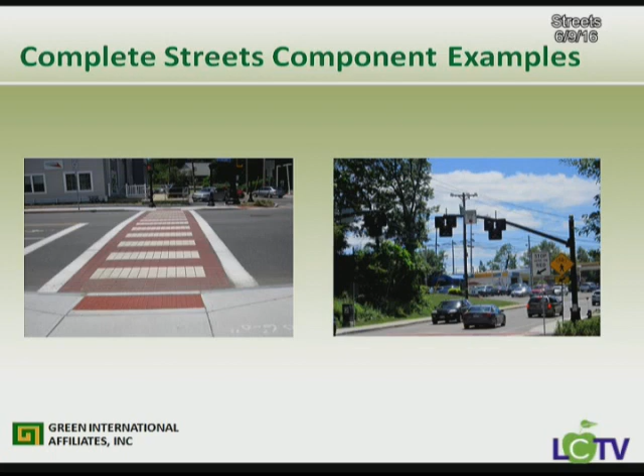We'll have some - if I can get through it, then we'll do questions on general items, and then, if that's all right, we'll go through our Littleton section and have more questions, and ultimately we'd like to just stop and have a conversation.

Again, this is just an example. On the left side, it's a road in Norfolk - a two-lane road, but they really tried to be careful, providing 2 lanes with wide enough shoulders that bicyclists can travel. Where there were a couple of intersecting streets for crossings, in this case there was a slight sight distance issue, so they had a little beacon. It provides access to a major recreation area in the town, so they were able to provide one sidewalk on one side of the street and bicycle accommodation - you can drive, walk, or bike to the rec center.

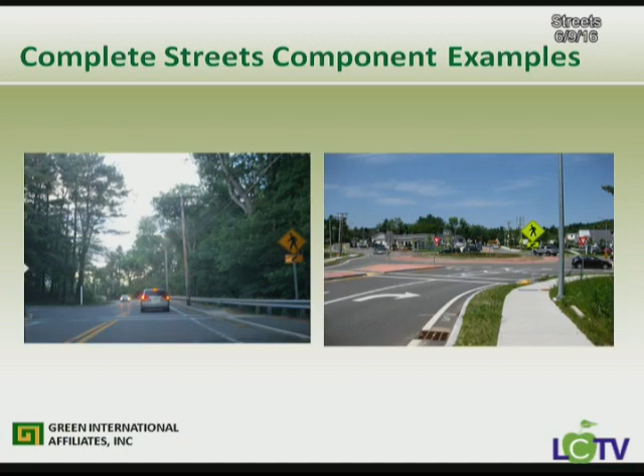And that's just on the right side, a picture of a roundabout. Sometimes instead of signal control, you might use a roundabout to control traffic, and again, break up the visual and slow traffic down.

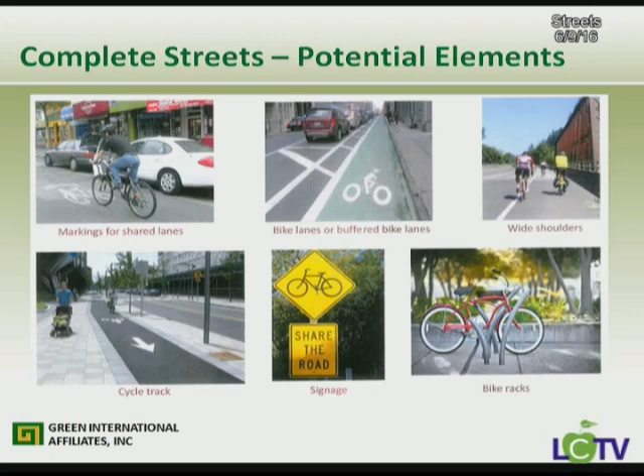Again, potential elements - these are different markings, different types of signage. You'll hear us say later about bicycle accommodation, and part of that is parking for bikes. What they're finding is if you don't provide any parking for bikes anywhere, it's just one more thing that reinforces someone's attitude against riding a bike.

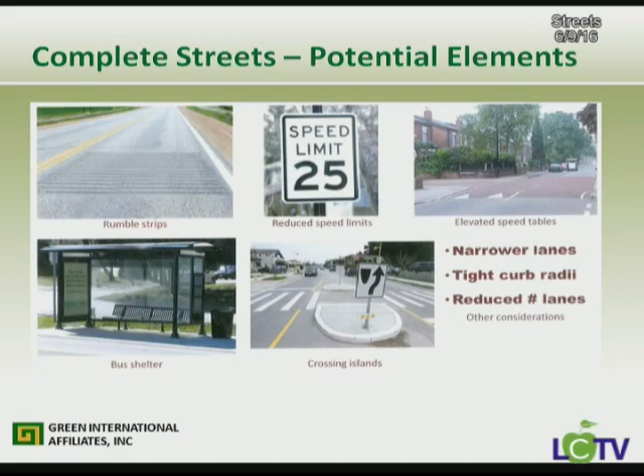Traffic calming measures, speed reductions, again, medians or something to break up the pavement, reduce the crossing.

But why is it important? It goes back to the overall concept - it provides for safe movement. It allows safe movement by all types of users, better health, even stronger economies. You start to reduce pavement and encourage walking, encourage biking. They find a positive in a lot of different areas. And it's fair.

The MassDOT Complete Streets program, I think, is probably the only one in the country that actually developed a grant program for complete streets. But instead of just handing out money, they said, okay, we'd like the town to think about it and put something together that's more comprehensive. Don't come in with a project and want to add a sidewalk to it, but think about what you want to do as a community. Their goal is if you get 351 communities doing it, all of a sudden we have a more connected and fair state - a Complete Street, got a complete state.

So again, it's to provide incentives to develop, and in the end, it's to facilitate better travel. Keith mentioned the Complete Streets policy, so that was the first level.

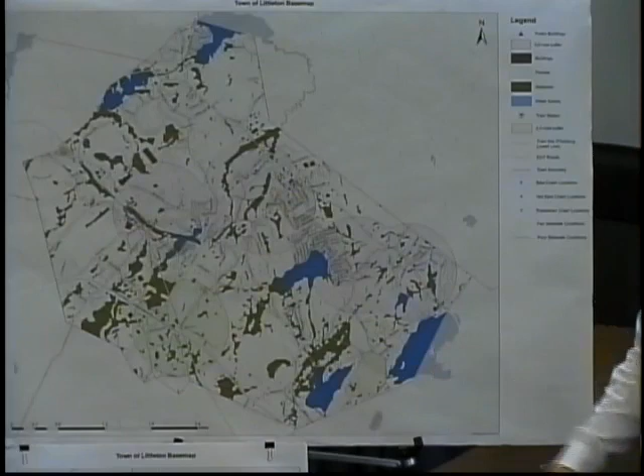So those were taken into consideration here, as well as any crashes involving pedestrians or bicyclists within that 3-year period. As Isabel pointed out, they're also shown on this map here. They're probably pretty tough to see, but feel free to come up and view them later. Here we have 2 bike crash locations in blue, hotspot locations are the green circles, and the pedestrian crash is the pink circle on the map.

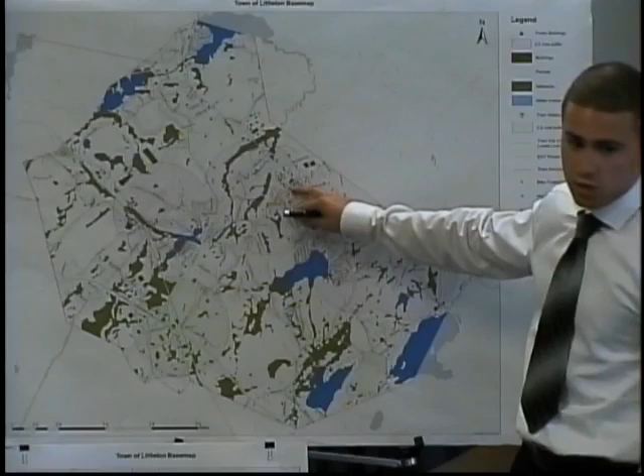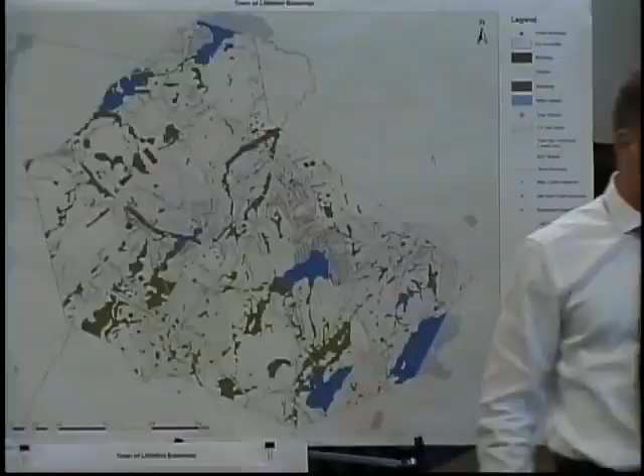So the pedestrian crash was at Kimball Street and the intersection with King Street. The 2 bicycle crashes were pretty close to the town common area. One was actually right at the intersection of Goldsmith Stevens Street and King Street. The other was near the post office on Jennifer Street at the intersection with King Street. Those were the only three crashes in the most recent 3-year available period involving pedestrians and bikes.

So after the safety data analysis, we conducted what we call a windshield survey. Bill mentioned this briefly in his presentation. Basically what we did was identify roadways within the town that we felt were of high priority, worth going to see what was available — the existing conditions pertaining to pedestrian accommodation, bicycle accommodation, the roadway widths, roadway pavement conditions, whether the roadway was wide enough to accommodate bikes, the sidewalk conditions, whether there were curb ramps at the transitions from sidewalk to pavement and at driveways on the roadway, and whether there were detectable warning panels present on those curb ramps.

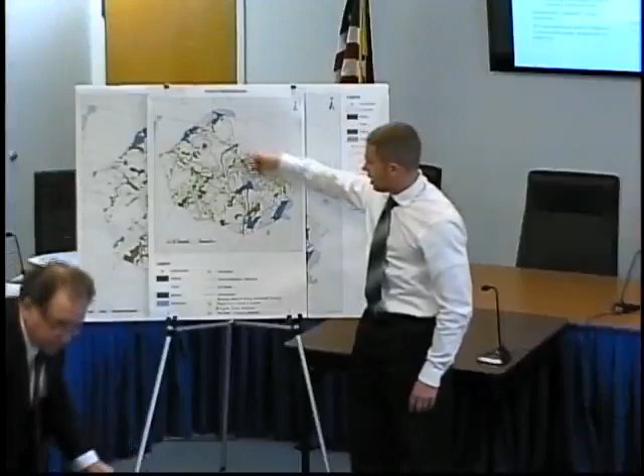And are those marked on that map? They are not marked on this map here. They are marked on this map here — the streets highlighted in yellow. So all the streets highlighted in yellow are the streets that we conducted the surveys on throughout the town.

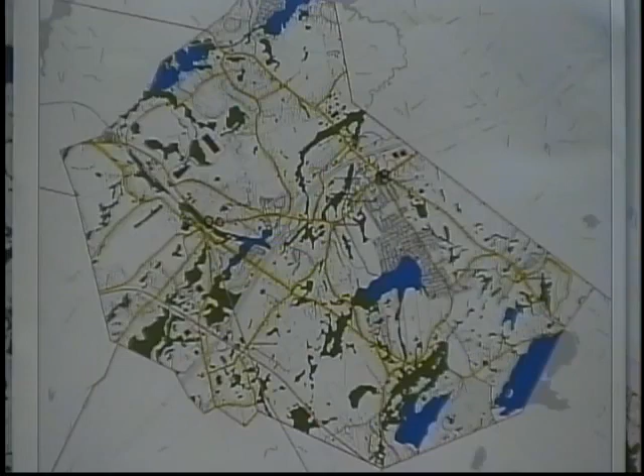Basically, how these surveys were conducted: we had 2 people go on these surveys, one driving. Obviously the driver can't take notes while driving, so we'd have the passenger take notes. The driver would analyze the roadway, see anything that jumped out at him, but mainly it was the passenger identifying any of the things I just mentioned — what we were looking for. We created segment forms and intersection forms, so there was a form for roadway segments, checking off all the things I just mentioned we're looking for, what's available for lighting on the roadway, and whether there were pedestrians or bicyclists traveling on the roadway during the time.

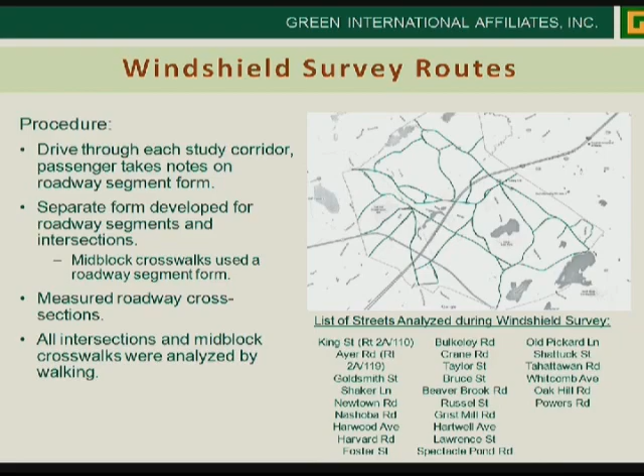I remember the day you told us you were doing it, so we could tell the police which roads it was, in case anyone said, hey, there's someone driving slowly — because periodically they would stop just to take measurements or pictures. Yeah, sure.

That was particularly when we would stop at any mid-block crosswalks along the roadway, like Keith or Jimmy mentioned, basically on the Mass DOT roads, King Street and Great Road. We'd get out, observe if there were handicap accessible ramps, detectable warning panels, warning signage, what was there at the crossing, as well as any crossings at unsignalized intersections. We did do 4 signalized intersections within the town: Great Road and King Street and Ayer Road, Great Road and Powers Road, and Great Road and Russell Street and Constitution Ave.

In addition to doing the windshield survey and reviewing the crash data, we also took into account background documents, including any plans available for roadway improvements and construction going on. We identified a few that are currently in construction, that we have designed, or are planned to be reconstructed in the future.

One that was just recently constructed, which we designed, was Harvard Road. To incorporate Complete Streets design aspects, we narrowed down the travel lanes to provide a 3-foot striped shoulder in each direction, to accommodate bicycles mainly. We also installed share the road signs for pedestrians and bicyclists, which can be seen in the top right picture, taken during our windshield survey last month.

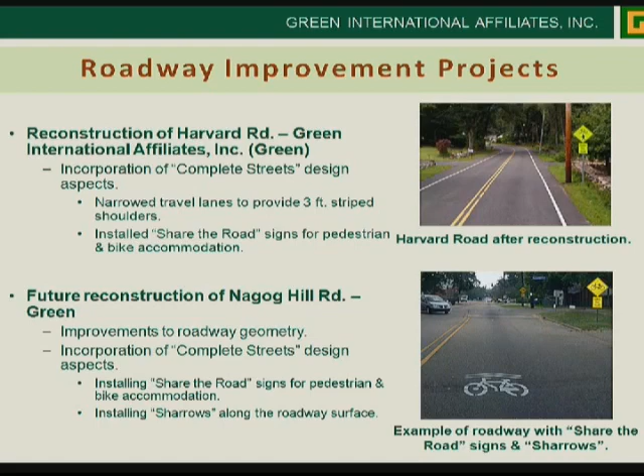Two more projects that we have designed: one currently under construction is New Estate Road, building a 5-foot sidewalk along it. The main reason is to provide a sidewalk connection for kids at the high school traveling on New Estate Road. This will be done in two cross sections: one includes a 3-foot grass buffer between the pavement edge and the sidewalk, 10-foot travel lanes, and 1-foot unmarked shoulders in each direction.

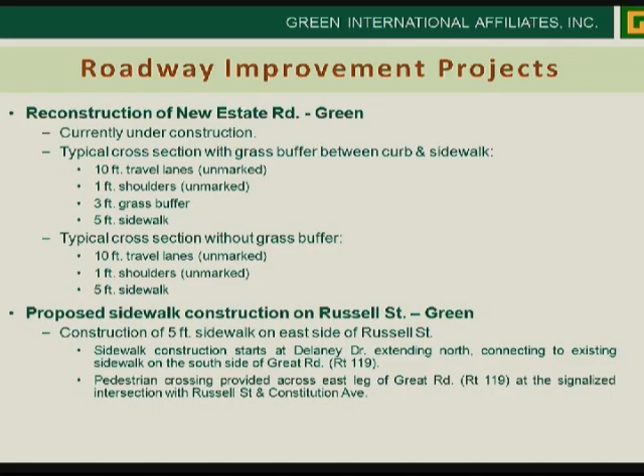Another future construction job Green has also designed is the proposed sidewalk construction on Russell Street. The project limits are from Delaney Drive to Great Road, constructing a sidewalk on the east side of Russell Street. This will tie into the existing sidewalk and connect to Great Road, accommodated by the signal at the intersection of Russell Street, Great Road, and Constitution Ave.

After the windshield surveys, we compiled all our data, sorted through it, summarized everything, and identified needs of improvement. Here we see the Littleton Common area, shown on the slide on the right. A few things we noticed: the wide crossing on the southwest side, across King Street at the intersection of Goldsmith Street and Stevens Street, currently a 75-foot crossing that's pretty wide open. There's poor driveway recognition, no bicycle accommodation, and insufficient pedestrian warning signage available to warn drivers.

I think there's one pedestrian warning sign facing westbound driver traffic going into that intersection - it just sort of scares you and you move into it. There's traffic coming from about 7 different directions, and a lot of driveways there that just come out of nowhere. That's where one of the pedestrian-bicycle crashes occurred, right at that intersection on Stevens Street - so that was an area of concern there.

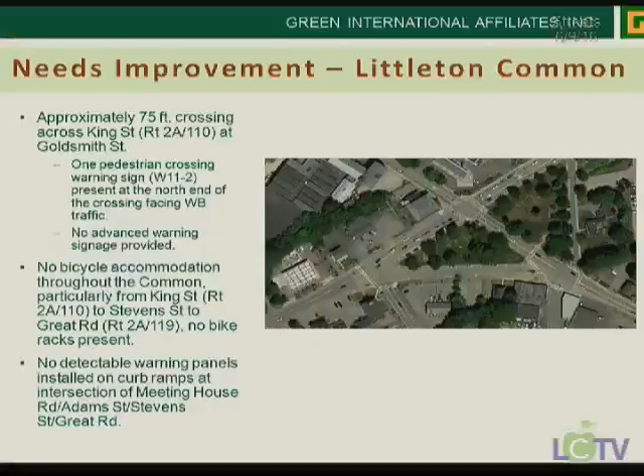The curb ramps are in pretty rough shape. As I'll highlight later, one of the crosswalks doesn't even lead to a curb ramp. In addition, the curb ramps at the signalized intersection of King Street and Great Road are in rough shape - steep, and not located near the pedestrian push buttons to actuate the signal. This is a scary area for a sighted person, and we have a blind person who lives in that area, so there's definitely a need there.

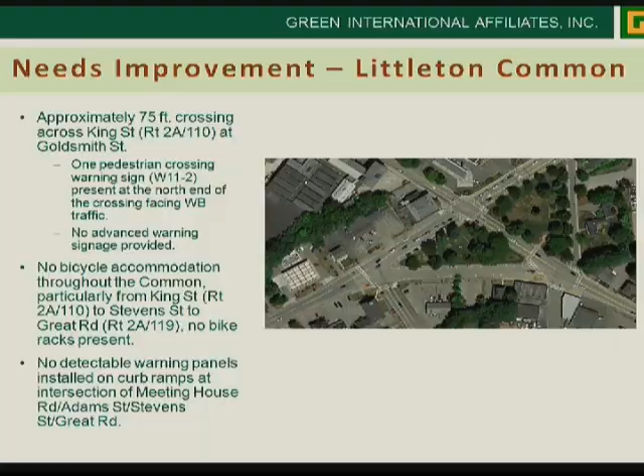Also in this photograph are a couple of areas that are wide open, even though they're off-street parking - it's a wide open entry into areas with no sidewalk at all.

We also identified Foster Street as a need for improvement. As you probably know, the Littleton and I-495 commuter rail station is located on the southern end of Foster Street. In addition to the need for pedestrian and bicycle accommodation due to the commuter rail station, it was also identified by a study done in January of this year, called the street scan study. They have sensors that scan all the streets in town and assess pavement condition to identify streets of high priority for roadway reconstruction. Foster Street was identified as the #1 priority due to its poor pavement condition.

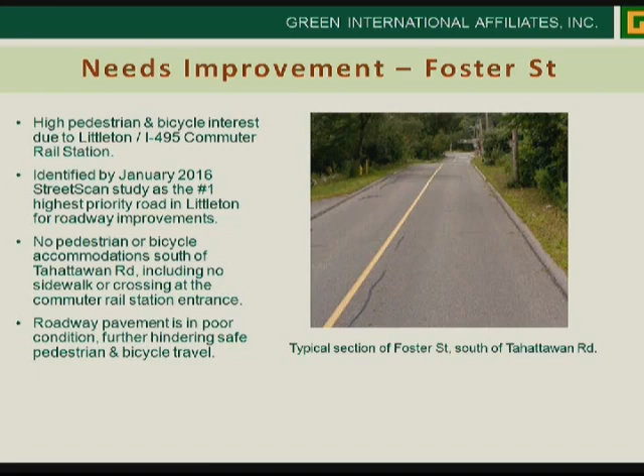In addition to the poor pavement condition, there's currently no pedestrian or bicycle accommodation south of Tahatawan Road. There's an existing sidewalk on the west side of Foster Street, but that terminates at the T intersection of Tahatawan Road. South of there, it's striped as a single yellow center line, 10-foot travel lanes, no shoulders, and no bicycle or pedestrian accommodation. The roadway pavement, as mentioned, is in poor condition, which further hinders pedestrian and bicycle travel safety along that roadway.

Taylor Street as well provides access to Foster Street, and it's also directly off of Route 2. There's a sidewalk along the northern segment of Taylor Street, then a gap between that sidewalk and a sidewalk just on the Route 2 bridge overpass. The sidewalk on the overpass ends and doesn't really connect to anything - there's no connection between Taylor Street and Foster Street for bicyclists or pedestrians.

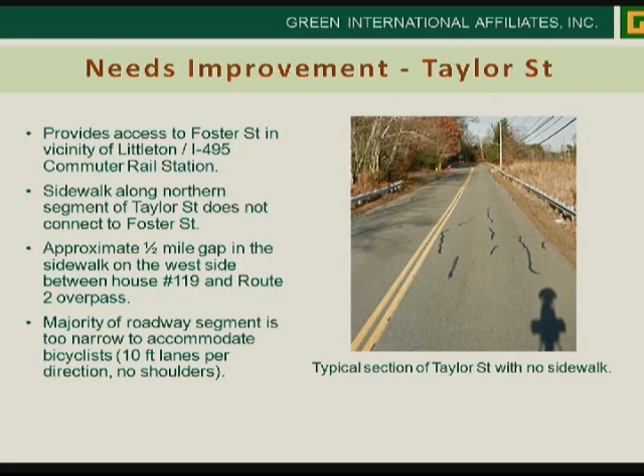And even further on, if you keep heading towards Acton on the south side, the sidewalk becomes even more and more difficult to find. It actually ends - you'd need to send an archaeologist out there.

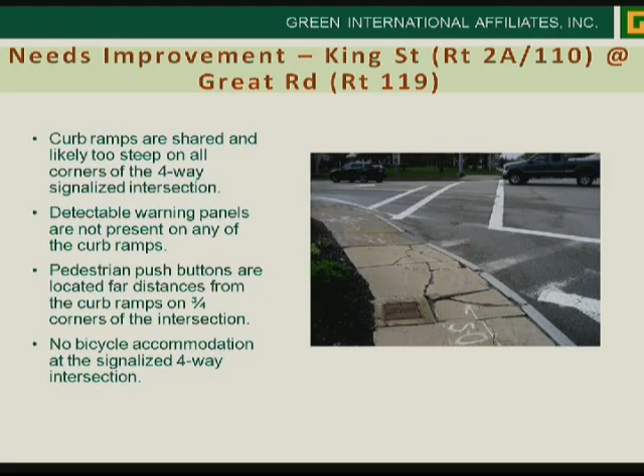I've already touched on this when we mentioned the Littleton Common area - this is the signalized intersection between King Street and Great Road, routes 2A, 110 and 119. Here, all the curb ramps are in pretty rough shape. The concrete is kind of withering away, cracking. The curb ramps are steep, and they're far distances away from the pedestrian push buttons to actuate the exclusive pedestrian signal phase at the intersection. There's no bicycle accommodation at the intersection as well.

Those ramps were put in the early 80s, when they reconstructed the common, and that ramp happens to be broken because it's such a tight intersection that the trucks drive over it all the time - that's why it's all broken. So those were identified as issues at that intersection.

Here is crossing across King Street from Rogers Street to the Castle in the Trees playground and the park. That was actually just renovated by Green International - they redid the basketball courts there and some landscaping.

Here, there's no detectable warning panels installed at the curb ramps. The pedestrian signage is out of date and also not consistent. The advanced pedestrian warning signs do not have ahead plaques, which some don't, but this could also cause confusion as to where the pedestrian crossing location actually is - is it there? Is it ahead? There's no real guidance there.

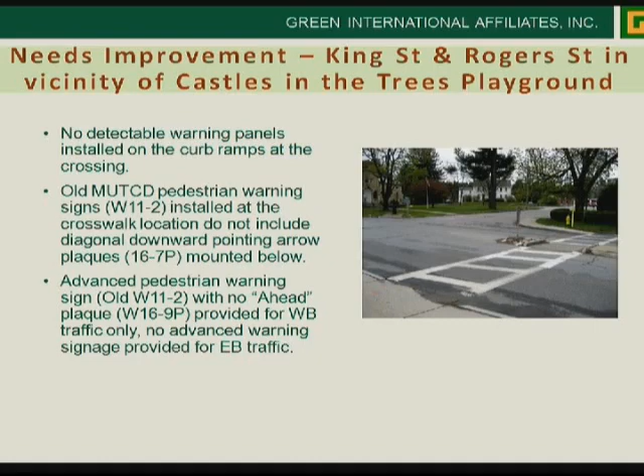Wasn't that a pedestrian fatality, but outside of the 3-year look back? Yeah, but that was installed, I believe, because of the fatality. The other crosswalk was further up past the historical building, which got removed and put here, and that was the design of the time - to put the little safe island in the middle - and the detectable warning panels weren't required at that point.

Okay, and here is the intersection of Russell Street and King Street. This was identified because there are 2 schools located on Russell Street: the elementary, Russell Street Elementary, as well as the middle school. And there's a sidewalk along the northern side of King Street, which is a major roadway and travel route in the town.

The curb ramps are in poor shape. It might be tough to see the picture on the lower right, but there's a huge pothole at the transition from the sidewalk to the pavement surface. There's also no crossing available on that roadway. If you're traveling on the northern sidewalk on King Street and want to get to the sidewalk on Russell Street, on the east side, there's no crossing, signage, or crosswalk markings for you to do so. So in addition to the poor ramps, no detectable warning panels, and trip hazards in the ramps and crosswalk markings, there's definitely room for improvement for pedestrians.

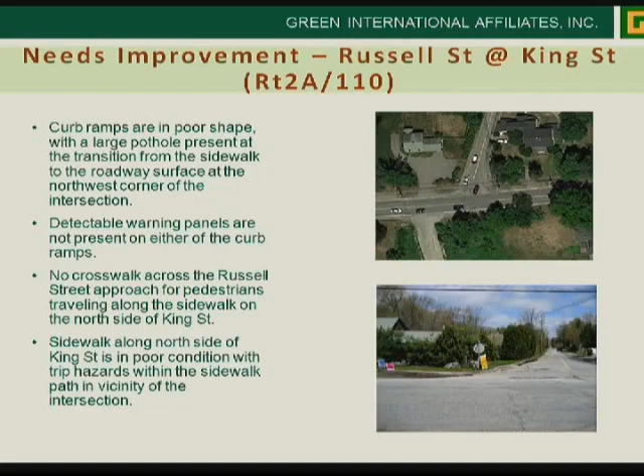We've met with the neighbors a number of times, and there's a real need for some traffic calming techniques here. As you've said, there are 2 schools on this street, but a lot of vehicles seem to be in a mad dash to get to the school, which means that intersection from King Street onto Russell gets a lot of traffic making quick turns. It's been a priority to figure out how to make that a safer intersection for residents as well as users.

Just to be clear, it's not a pothole in the road, it's from cars driving off the road, and primarily the buses, that create the hole. Right, it's beyond the curb. It's been filled in, but every single street going up that side, there's no crosswalks on any other streets going up.

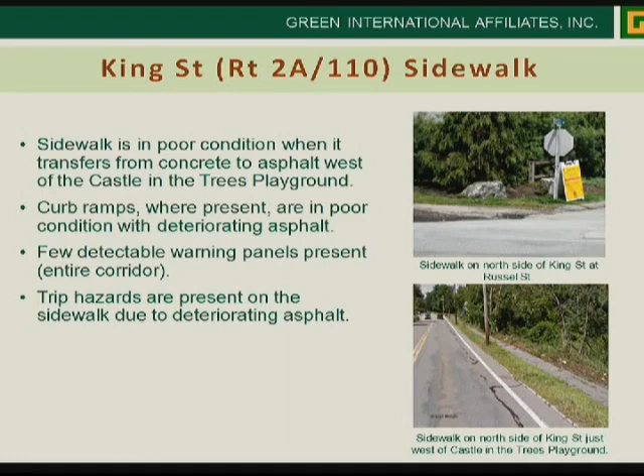Here we identified the King Street sidewalk on the north side. Once you get west of the Castle in the Trees playground and park, the sidewalk is in pretty poor condition. Once it turns from concrete to asphalt, it gets pretty narrow. In some spots the asphalt is deteriorating, causing potholes or holes in the sidewalk, which could be potential trip hazards. There are few detectable warning panels present along that stretch where it transitions to driveway surfaces, and as Jimmy mentioned, there's really no crossings at the side streets along that segment.

Can you go back to the warning strips for a second? You said there were no detectable warning strips at the driveway entrances. I didn't think they were required at driveways, only at road intersections. They are, I believe, for commercialized driveways. I believe so, for businesses and commercial ones. So not for residents? Not for residents - you're talking like along Great Road, for example.

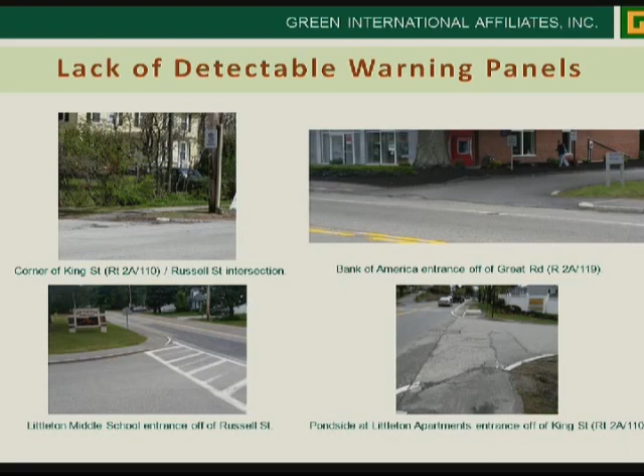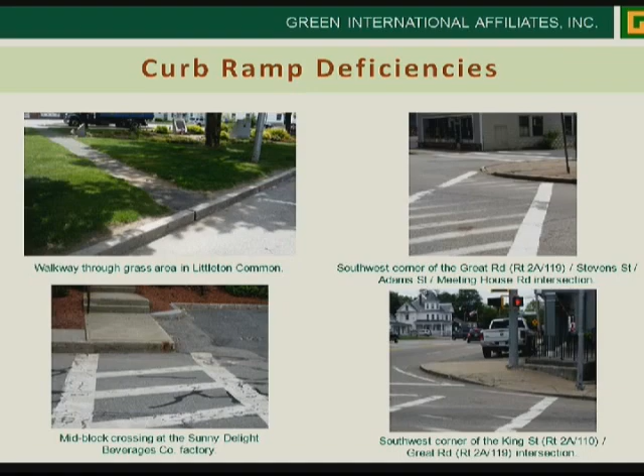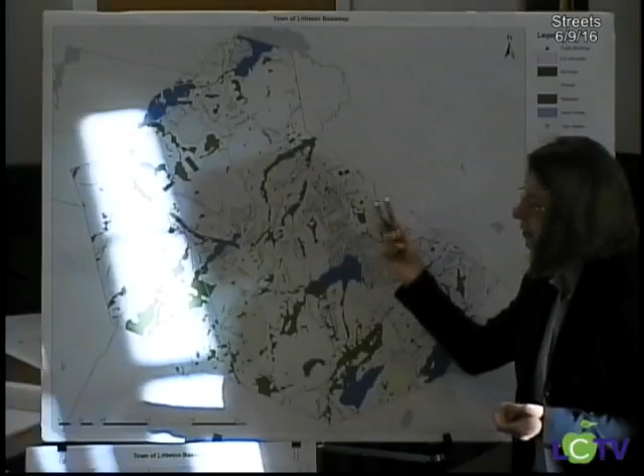And I wanted to get your attention once more to this map, because we looked at essentially going back to the complete streets policy. There was identified the need or the want to link projects to parks, and that's why we looked at parks here at Littleton Common, for example, to T-stations, to connectivity, to enhance multimodal transportivity.

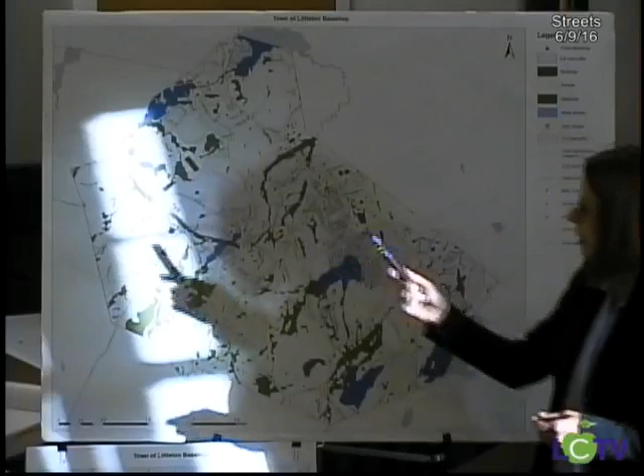And then as well, so we had parks, schools definitely, and public buildings. And so what you can see here on the map, with the red triangle, are the schools, and we have also public facilities on the map as well. And what you see here as the circles, that is a focus area around those areas, and within a half a mile travel distance, how people could get there without their car.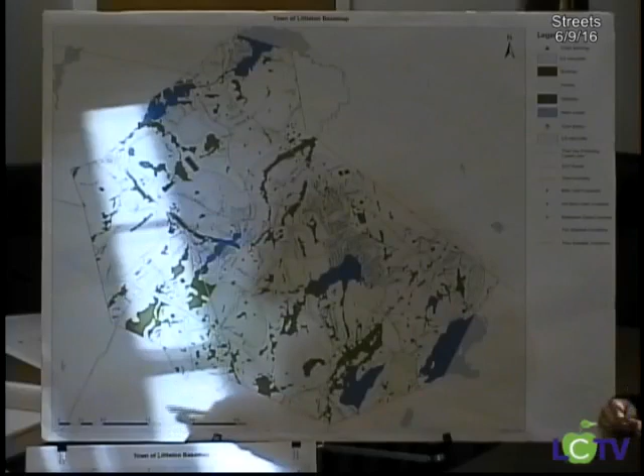So that's why we looked at those areas very closely and thought, okay, what is available there? Are there sidewalks available? Are there bike paths? Are there crosswalks or not? In what conditions are the sidewalks? How are the ramps? And bike racks, yes or no.

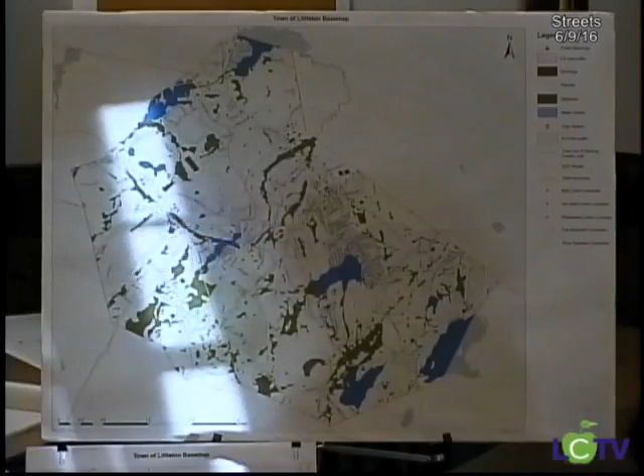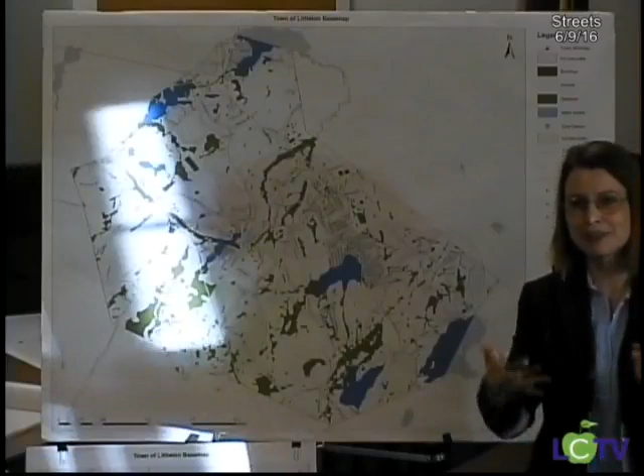So the whole list we went through, Jason has presented, and that's broken down to the focus areas that we identified from reviewing the complete streets policy, but that we thought would be valuable bringing forward.

But this would lead us into the discussion, because we have identified a lot of projects. Some of them were identified as priority areas before in the scan study, and some have already, you all nodded your heads and said, well, these are definitely areas that would need some improvement. So we have a long list already of things identified.

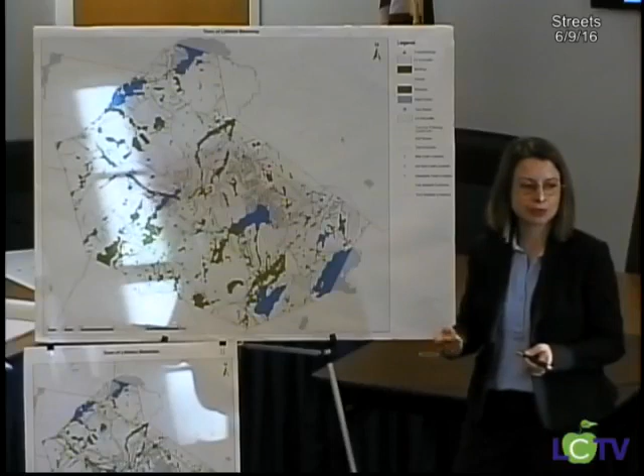And so the next step would really be to prioritize those elements, those lists, and see what does the public think, how we could best move forward. And as Keith already mentioned, we are aware that there are a lot of projects out there. There are a lot of things that could be done, and so not all of this can probably be done with the grant money that is available now in the short time. But what we would suggest is just have a very comprehensive list, and then prioritize what is worthwhile bringing forward and moving forward with this.

I'd agree with that approach, that I think our Tier 2 prioritization plan can be the universe of things that we would like to see done eventually, and then from that prioritize those specific things that we can actually get done in a Tier 3 implementation application. I'll use one example that has been at the top of our list of things to do, and that is the sidewalk on Russell Street, for which we have a commitment of $65,000 from the developer of the Point to contribute towards that project.

However, and which Green is designing for us, based on the most recent project cost that I saw of $180,000 for that sidewalk, if we can apply for a $400,000 grant, 180 minus 65 equals 115. And so you start with that and build that into a $400,000 project. So I think because it's got to be a shovel-ready project or ready to go, well, that one's ready to go.